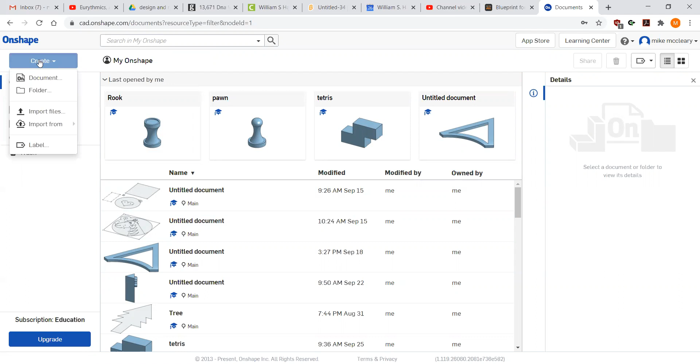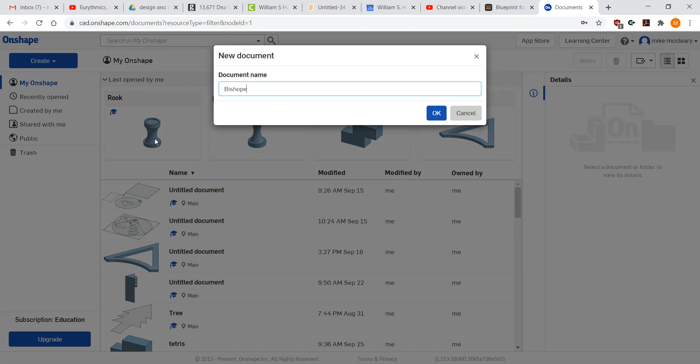All right, here's another instructional video. This one is on how to make a bishop. There we go, and we can even spell it right with the aid of a computer. All right, we'll go from the front, and we start, and much like the rook, it has a base of 1 1/4, which we want half of,

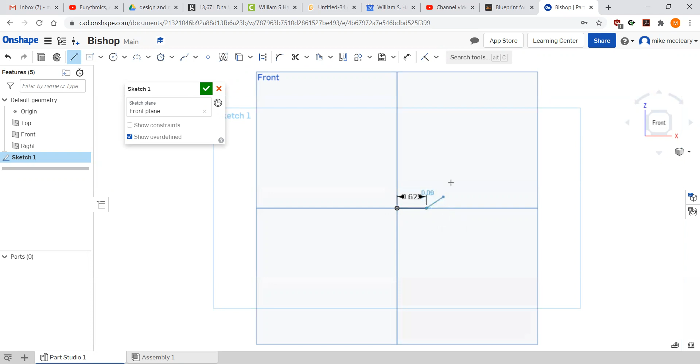which is 0.625. Can go up by 1/4 of an inch because I do that on all of them. I like to go 0.1 in, although that is not a required dimension. I'm going to move my dimensions out of the way.

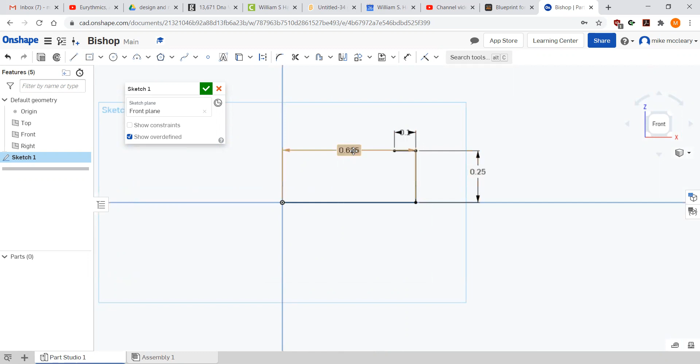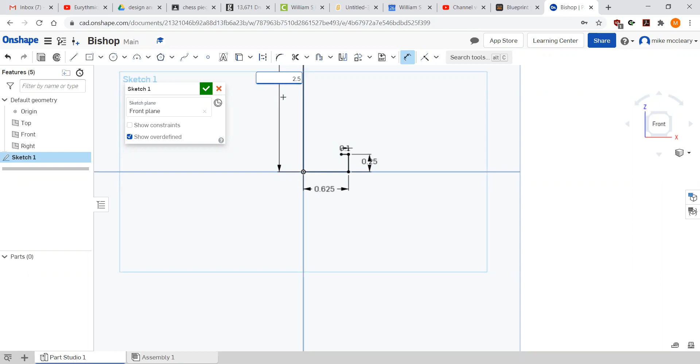I'm going to draw the height, which I believe is 1 1/4. Or not 1 1/4. It is 2 1/4. Excuse me, I mean 2 1/2. Okay. All right, and this one works pretty similarly to the pawn. It's really just an advanced pawn. I'm just going to go up 3/4 of the way.

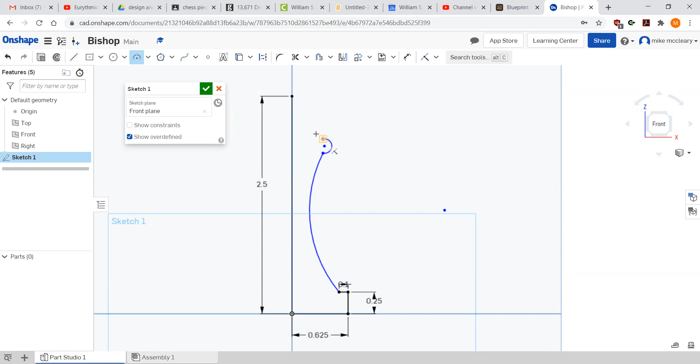Now, bishops usually have a little bit of a riffle in them, like a little band there. And they usually come up to a point. Then they have a little sphere on the top. So I'm going to go in here. And again, just like the pawn, I'm going to go in at a right angle. Not entirely happy with this, but it'll have to do. I might redraw this. Let's go revolve this.

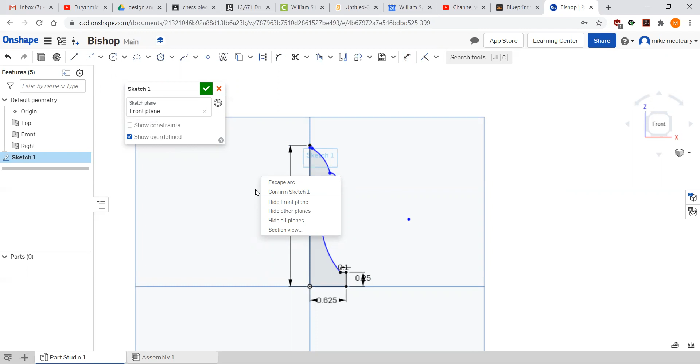Come on. All right, there we go. Revolve. There we go. Okay. Revolution axis. Go select. There we are. Let's go look at this in 3D. That looks a little bit big. That looks a little bit small. Let's fix this.

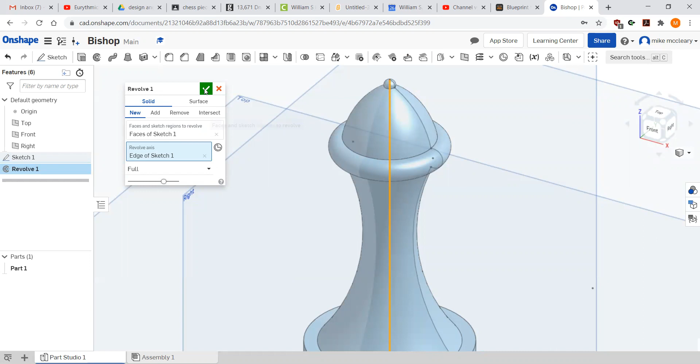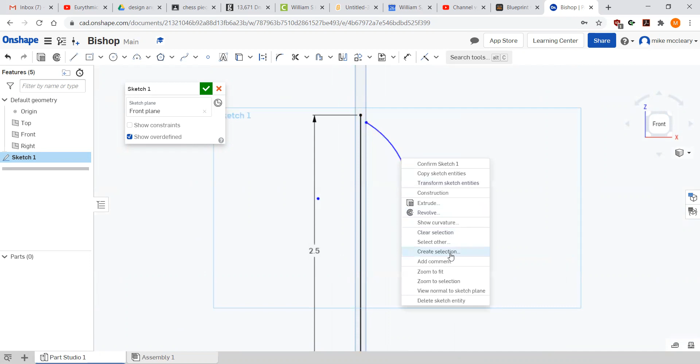Gonna delete these arcs. No shame in deleting your work and trying again. It takes less time to start over usually than it does to go through and fix stuff for a lot of these things. So I'm going to start it a little bit lower this time.

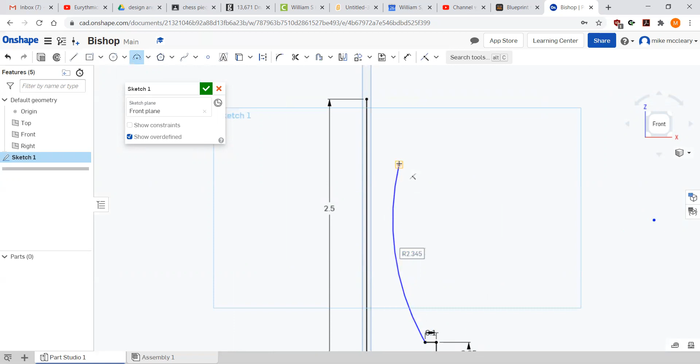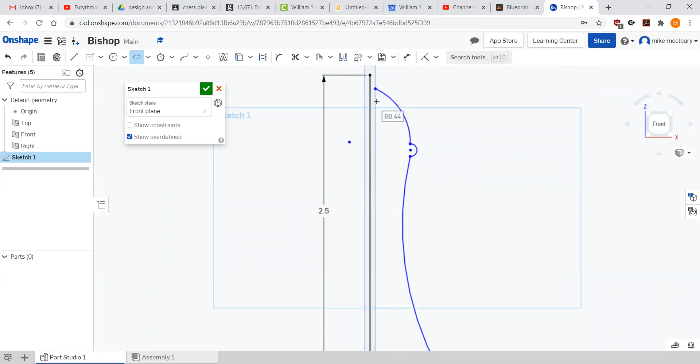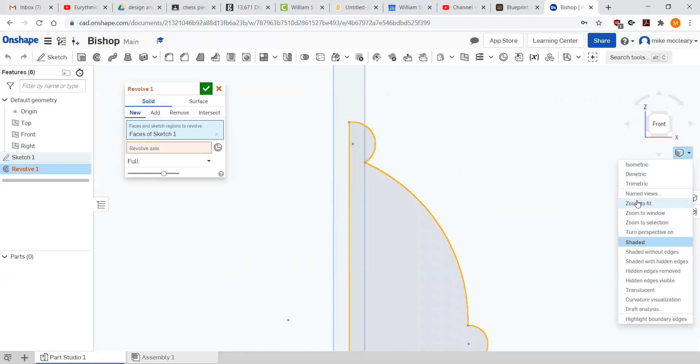And make this a little bit smaller. Gonna go and not quite make it all the way up to the top like the time before. It can look like that arc is continuing in an S-shaped pattern. And let's go there. This looks a lot better. How thin this is concerns me. I think that might fall off, but I think it's good enough for now. Better. Not great, but better.

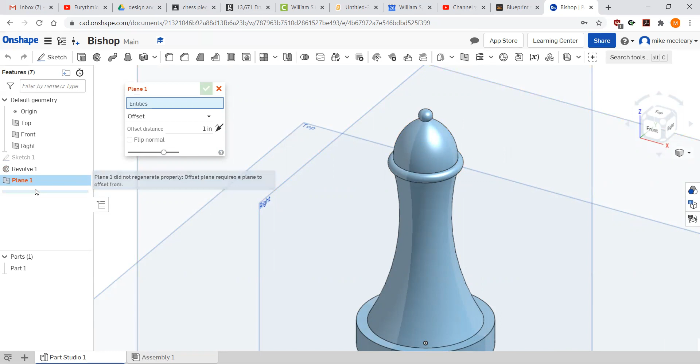All right, one thing that is important on a bishop is that it has a little hole for the pope hat. That's what that is. It's a little pope hat. It's actually called a mitre. And to do that, we're going to do offset from plane. We're going to choose this right plane.

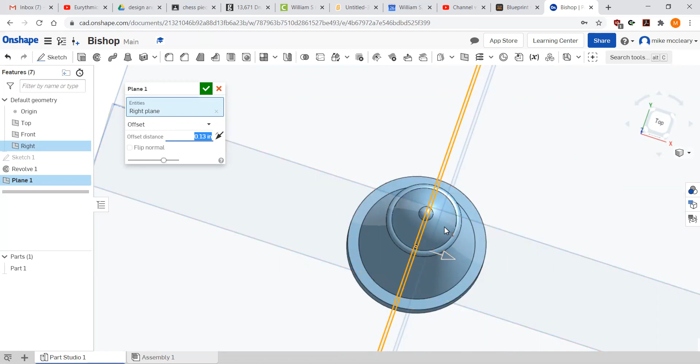And if I look in from above, here's what I want. I want this to be part way through, about there. I'll go back a little bit because it's going to be on one side of the line or the other. So I'll go right there. And I'm going to start a sketch on that plane. Come on, plane one, select.

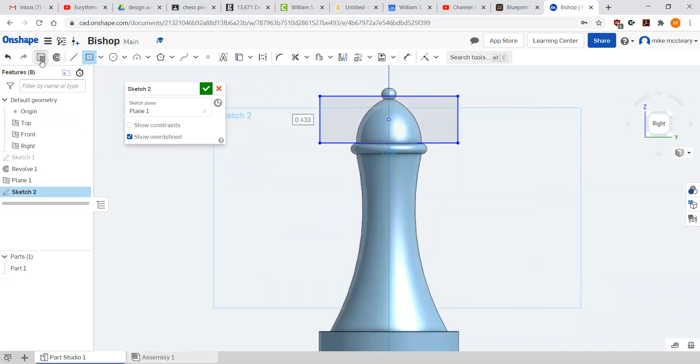Let's go from the right. Here's what I'm going to do. I'm just going to draw a rectangle. I'm going to make sure it goes outside the lines. And I'm going to extrude that rectangle. I'm going to look in 3 dimensions. And bishops usually don't have a big old block.

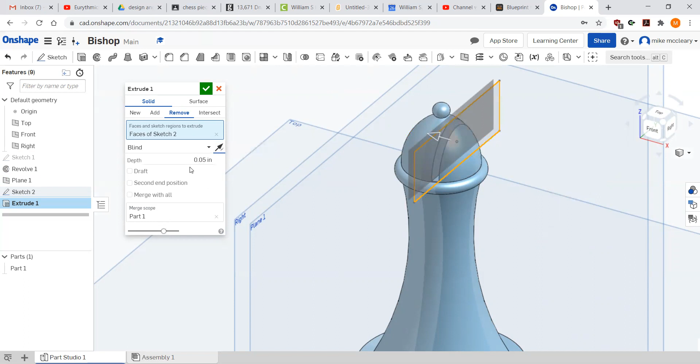What they do is have a remove. I'm going to change the direction. Is that direction good? Let's see. Well, minimally, it's going to be pretty small, 0.05. There we go, 0.05 in that direction. Doop, there's a bishop. Let's go through, put our name on it, because we've got to do that.

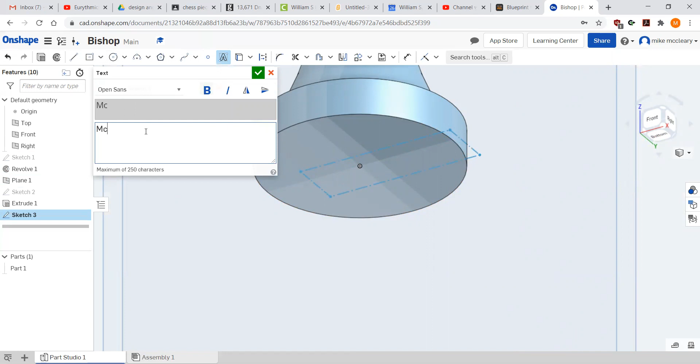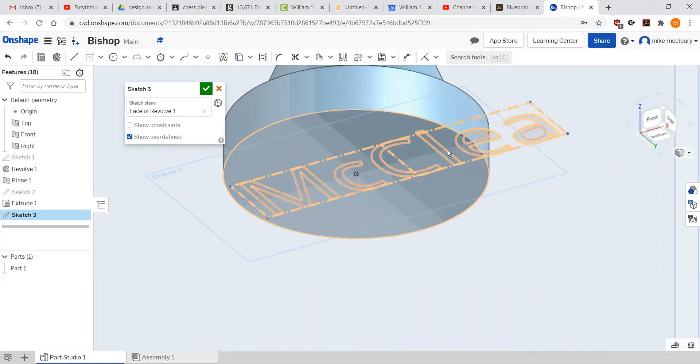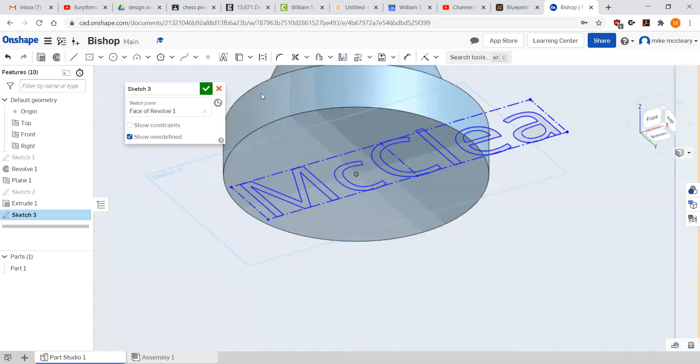Just going to remove a couple letters from my name so I know it can fit. All right. Ugh. There's no scale function on this. All right, let's go and edit the text. Text sizing in this program is not generally the best. That ended up being a little bit larger this time.

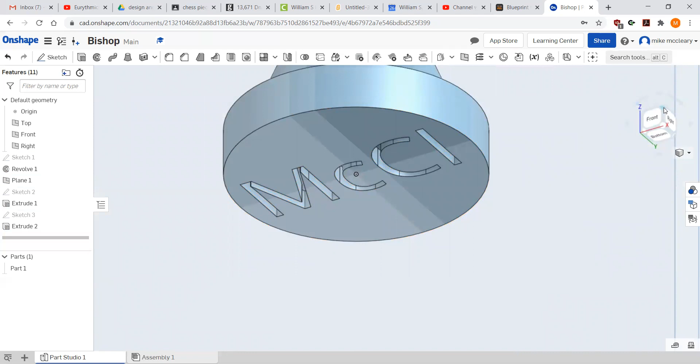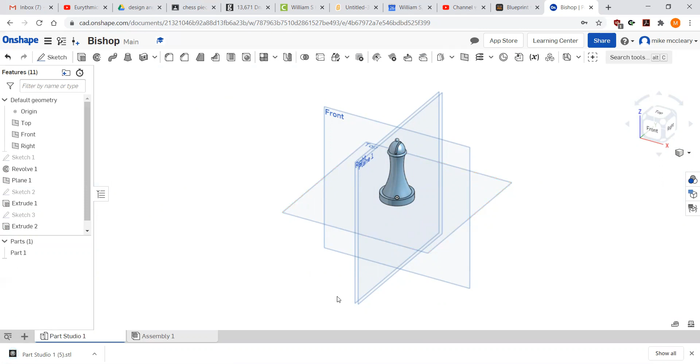All right, so we go through, we cut 0.1, and your work can be returned to you without being confused with other things. When we go, we export it as an STL file, download it, and after we have downloaded it, we go over and we attach it, and we make sure in the private comments that we put what color we want, either white or black.

So put in black or white, because that's the colors that chess pieces come in. These are going to be printed. All right, that is the bishop.